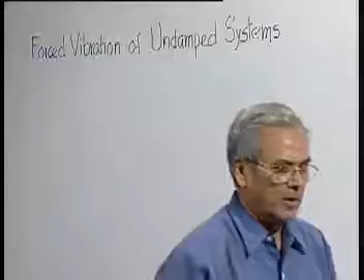Again, to keep our discussions simple at the beginning, we take up a single degree freedom system subjected to excitation force. Now we should also beforehand know that forcing, what does it mean?

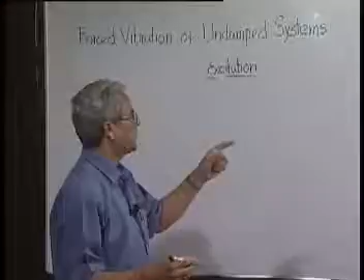So excitation of a system can be of various types. First of all, we will classify the situations according to the nature of the forcing function or the disturbance. If the forcing is purely a harmonic function of time, like say if we call this the force, this is called harmonic excitation, because the excitation, the function of time, is a harmonic function of time.

But before that, we should classify in general excitation as periodic, that means where the forcing function is a function which repeats itself after a fixed period. So this kind of excitation which repeats after a fixed time, which we call time period, is called periodic excitation.

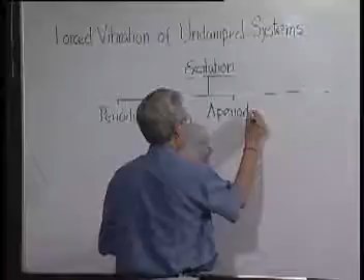Another kind of excitation can be aperiodic. Aperiodic excitation can be anything like this, which does not repeat itself after a definite time, that is called aperiodic.

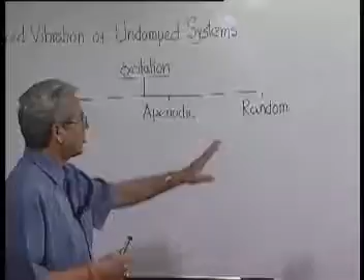And there is a very special case which we will not be able to discuss, but nevertheless very important, called random. There are many cases where the excitation is of random nature, which has certain special characteristics. What is random? But we will not go into those things, because we will keep our discussions to the simplest possible situation.

However, this periodic excitation can be further classified, as I was mentioning initially, into a case called harmonic, other is anharmonic. Say the second one, it is periodic, but it is not a simple harmonic function of time.

The classification of excitation can be again done from a different point of view. Here we have been doing it from the point of view of the nature of the excitation as a function of time. The other way of looking at the classification problem is what is the manner in which it is excited. For example, I can take this and try to vibrate by applying a force.

Sometimes a system can be oscillated or disturbed by applying some kind of a disturbing motion to its support or the wall to which it is connected. Sometimes a system vibrates by itself, only thing is we have to supply a source of energy. Sometimes it is excited by a periodic variation of one of the parameters, either stiffness or inertia or something.

So there is another way of classifying excitation, based on the fact of where from or how it is being excited. So there we can have force excitation. The other one, where the support on which something is resting is oscillated, that is called base excitation. Other one is self excitation. And there are cases, of course, which we call parametric excitation.

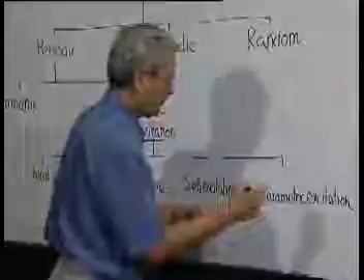So our problem of forced vibration can be any kind of combination. It can be a periodic anharmonic base excitation problem.

As always advised, we should take up the simplest possible situation. We have taken the simplest system, an undamped single degree of freedom system, but for forced vibration now, excitation also will take the simplest form - harmonic excitation, given in the form of either a force or a moment. Another reason harmonic excitation is so important is that any periodic function of time can be represented as a Fourier series, where each term or component is a harmonic function of time.

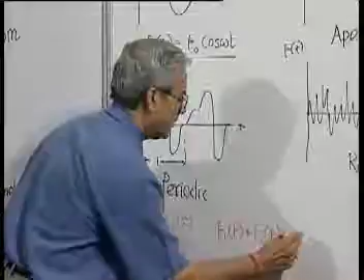As we are dealing with only linear systems, if a particular forcing function f1 gives a response x1, and another forcing function f2 gives solution x2, then when both are combined, they will give the response x1(t) plus x2(t). This is a very important result, but valid only for linear systems.

So if a periodic function of time can be split into a series of harmonic functions of time, then for each harmonic function we can get the response, and the resultant response will be the sum total of all the responses. So if we know how to solve the problem for harmonic excitation, we can solve for all periodic functions of time.

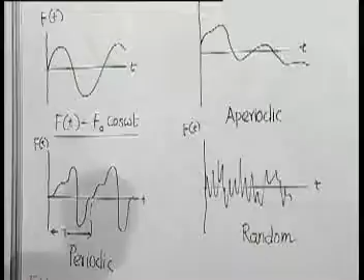Even aperiodic functions of time can be represented using an infinite Fourier transformation, where instead of discrete frequencies, the frequency spectrum will be continuous - we will see such cases. The conclusion is that even this problem can be solved using the system's response to a harmonic function, because this can also be represented in terms of harmonic functions of time using Fourier transformation. So if we are handling linear systems, knowing its response to harmonic functions of time can give the result of any type of forcing.

With this little introduction, let us solve the problems one by one. First we will take up the case of an undamped system with single degree of freedom, which is excited by a force that is a simple harmonic function of time.

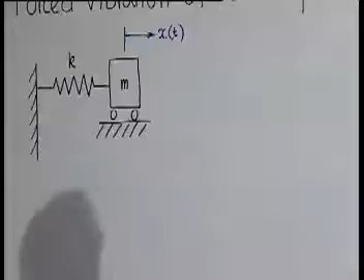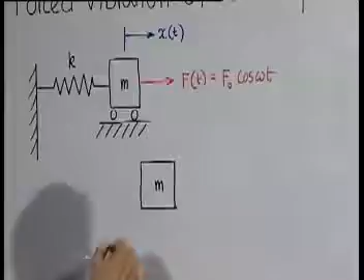It's a very simple problem. Let us find out the expression for x, that is the response of this system. At any instant of time, the forces acting on this system will be kx.

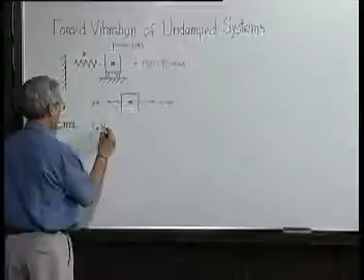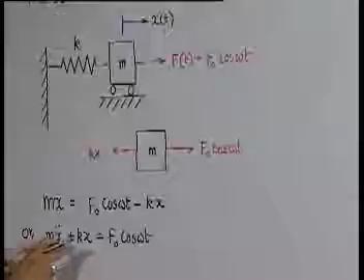So total acceleration in this direction, x double dot multiplied by m, has to equal the total force in that direction. This gives the differential equation which you have to solve. We know that the general solution will have two parts: one is the complementary function, that is the solution of the homogeneous part of this equation, mx double dot plus kx equal to 0, plus the particular integral, which we have to find out for this case.

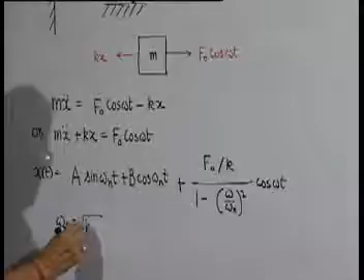So the complementary function, the solution to the homogeneous part of the equation, we already know from our previous lectures. This is the complementary function, and this is the particular integral. Here, omega n is again the natural frequency of the system.

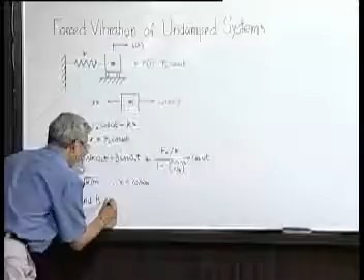We also define another quantity, R, the frequency ratio, given by the ratio of the forcing frequency to the natural frequency. Now these constants A and B will depend on the initial conditions - that is, what is the starting velocity and position.

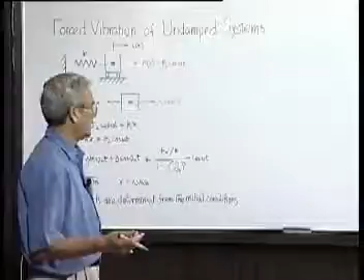So let us now try to solve this problem. We know x(t) is equal to A... so x dot(t) will be...

Let us consider a relaxed condition to begin with: at t equal to 0, let both x and x dot be equal to 0. This is something which is possible in forced vibration. In free vibration, if we give initial conditions as x and x dot both 0, the system will continue to remain at rest. But since now we are disturbing the system, it will oscillate.

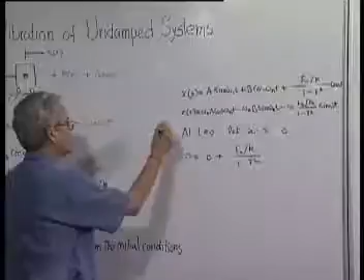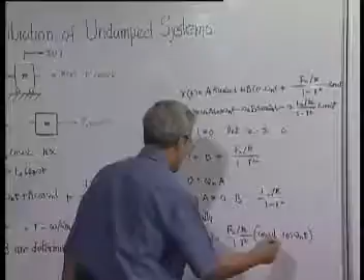So putting this in, what we get is 0 equal to B plus... and if we put t equal to 0 for x dot equal to 0, we get another equation. So the two conditions give us A equal to 0 and B equal to minus... and the solution becomes this, which can be written in a slightly different form.

This is pure trigonometric manipulation, so this is our final solution that shows how a perfectly undamped single degree of freedom system will respond to a purely harmonic forcing function like this. So let us plot it.

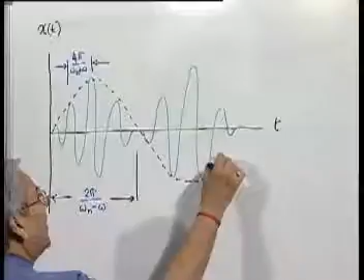So in a crude manner we could say that this is a harmonic function of time where the magnitude or amplitude fluctuates slowly with this form, and that is how we are getting the fluctuation of the amplitude as a slow process, with a time period of 2 pi by omega n minus omega. This whole thing completes one cycle, and this fluctuation phenomenon is known to you perhaps, which we call beat, and the beating period is this one.

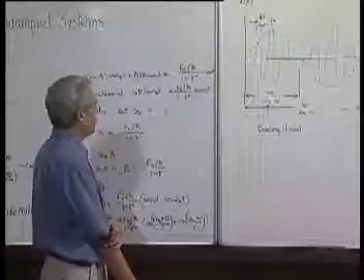Now one thing we see: suppose what happens when we start from a low value of omega. Omega is nearing 0, that means r is nearing 0. So this will be approximately 2f0 by k, and this will be approximately sine omega n by 2, and this will be more or less the same. But what we find is that as omega increases, it approaches omega n, when r approaches 1.

What happens to the beat frequency? Beat frequency is this. So when omega approaches omega n, the beat frequency or beating period approaches... since beat period is 2 pi by this, the beating period will approach infinity.

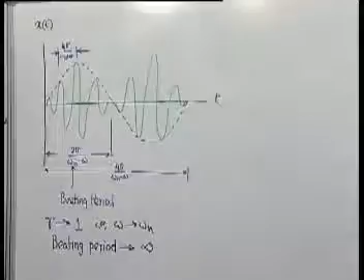Another thing we find is that the amplitude, the maximum value to which it fluctuates, depends on this quantity. And here, when r is approaching 1, this is gradually exploding, and the amplitude, which depends on this, also approaches infinity. So therefore, if we want to plot this under this situation...

This is a case where r is equal to 1. What will we get? It can be shown this angle is tan inverse, and of course this is still...

So now we find that when r is equal to 1, that particular case has an infinite beat period. That means it never comes back, it keeps on increasing. The maximum value to which we reach also keeps on increasing, and it can be shown mathematically, though we will not go into those things, that this amplitude will keep on increasing linearly, and the rate of increase can be decided by this angle of the tangent. So what is going to happen is that if such a system is there, it will keep on increasing in its oscillation amplitude indefinitely, and that is what we call resonance.

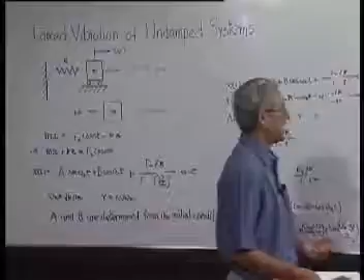That is why we should remember our earlier caution, that when a forcing function is acting, we should be careful that the forcing frequency never really goes anywhere near the natural frequency of the system. That is why when something is being designed, its natural frequency should be estimated, and it should be ensured that the system is never subjected to a forcing function or excitation where there is a chance of resonance.

These are the kinds of things perhaps you have heard, that when a military marches through a bridge, left right, and normally on solid ground they keep marching all in unison, that means everybody is in phase. But once they cross a bridge, they are always told not to be in phase or unison, and they are not supposed to march, they walk through instead. Because in case all these hundreds of soldiers keep marching with the same frequency and phase, the forcing function could match, or at least come close to, the natural frequency of the bridge, and it can cause disasters.

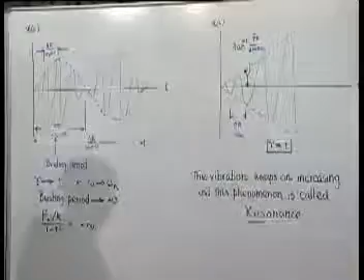And therefore, this is the point we wanted to make. But the common view held sometimes, that if resonance takes place, the amplitude of vibration becomes infinity, is not so. Actually, what happens in resonance is that the intensity of vibration keeps on increasing indefinitely. If you allow infinite time, and if the system is capable of taking infinite deformation, it will go to infinity. But really what happens is that the system gets damaged because of large scale oscillations taking place.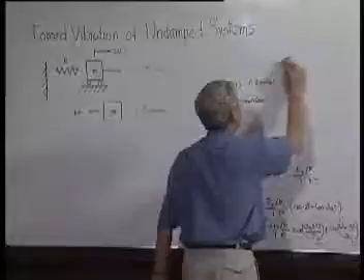However, this is a very idealistic situation, because in nature it is impossible to make a system which is absolutely free from any energy dissipation. Therefore, to make our analysis somewhat more realistic, even if we consider the system to be notionally undamped, meaning we don't show a specific damping agent or damper, we still have to keep in mind that there is certain amount of dissipation. It may be very small. In reality, even the very minute amount of damping present in a system will damp out the complementary function or the free vibration part. And how the response will look will be this.

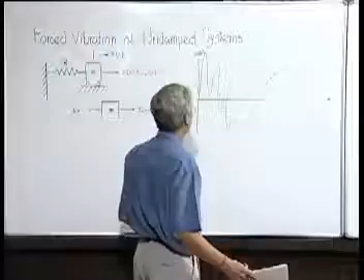Of course, I have shown this takes a short time, but in reality it may continue for a large time. Eventually the initial free vibration part, that is the free vibration part, will gradually damp out, and what will remain is only the complementary or only the particular integral.

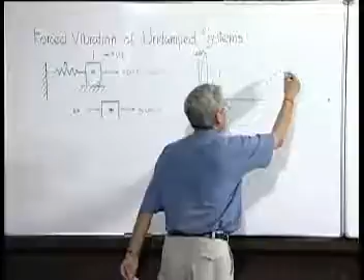So the response in the steady state situation, meaning it will keep on maintaining its nature and character, is called the steady state. In steady state, the solution xt is only the particular integral part, because the natural vibration part represented by the complementary function has gradually died down.

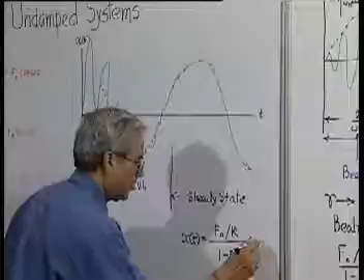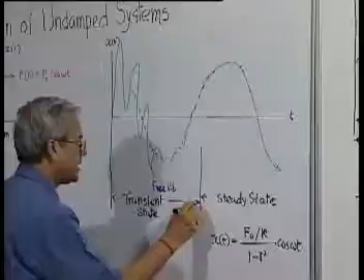That is the response, and this is what we call transient. It is a passing phase. So this does not repeat itself. After it reaches the steady state, there is no further change, and there the response is this.

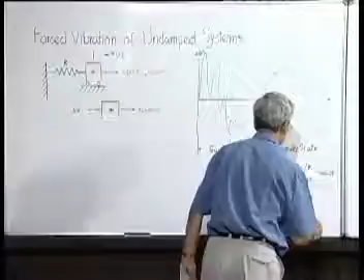So in general, our primary concern is the response of a system in the steady state, which in this particular case happens to be this. Of course, R is not equal. Now, you see this f0 by k, here we find that the forcing function is cosine omega t f0, and response is also similarly some quantity into cosine omega t.

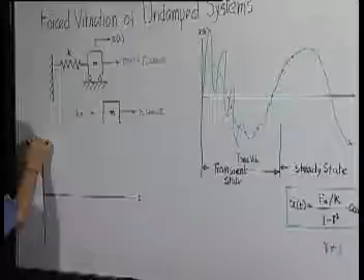So if we plot in the steady state, the response will look like this. If we plot both x and the forcing function in the same graph, it will look something like this. And the response will look like this, where the magnitude of this is f0 and magnitude of this is f0 by k. This is the situation when R is less than 1.

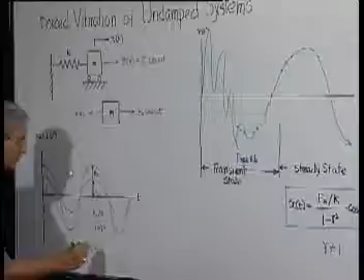When R is more than 1, then what will happen? Then for this case, x will be like this. I want to keep this always a positive quantity. So we can write this as r square minus 1 and take minus sign here, and we can write this as so. Therefore, what will happen now is that the forcing function and the displacement response will be just out of phase.

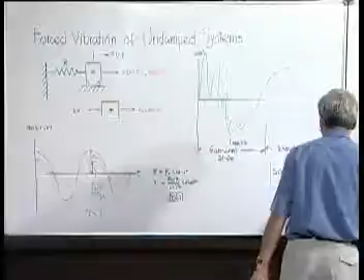Now this quantity f0 by k, what is this? This is nothing but the static deflection if I apply this force, that is f0 statically. So f0 by k is the displacement of the mass from equilibrium if the same load is applied in a static way, not dynamically. On the other hand, if the same force is applied dynamically, the maximum deflection is nothing but the amplitude of oscillation, which is f0 by k divided by this quantity.

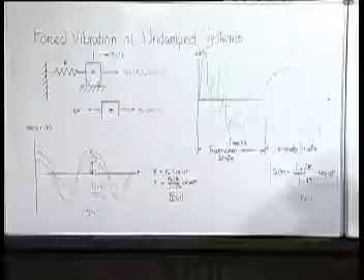So for this ratio, the amplitude of oscillation divided by the displacement which is static when the force is statically applied, we take its magnitude only, that is x divided by f0 by k magnitude, and this is nothing but, as can be seen here, x divided by f0 by k is nothing but 1 by 1 minus r square. This is called m, or magnification factor.

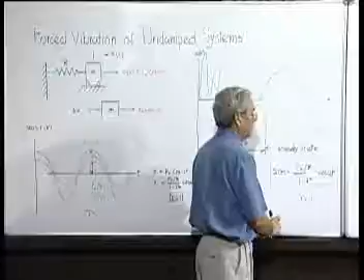It means that when a load is applied dynamically, the displacement of the system gets magnified compared to the situation when the load was applied in a static manner. Now, how does this magnification factor look?

This magnification factor, when we plot it as a function of r, it starts at r equal to 0 with magnification factor 1. At r equal to 1, it shoots up to infinity. When r is more than 1, it will become negative, but we take only the mod, so it becomes positive, and it asymptotically approaches 0 as r tends to very large values.

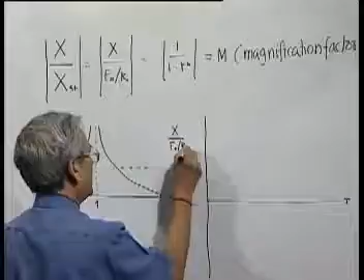Of course, if we just want to plot the ratio of the amplitude with the static deflection, when r is less than 1, x is positive and this quantity is positive. But when r is more than 1, x is negative because this quantity is negative. But if you take the mod of this, then we get back this same term.

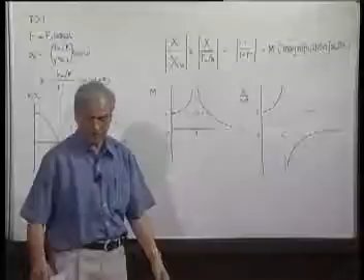So this is called the steady state response of a single degree of freedom undamped system, whose response characteristics are indicated by this plot, where the magnification factor or amplitude at a particular frequency is given. For the whole range of possible frequency ratios, the magnification factor has this kind of characteristic. This is the simplest situation which we have discussed.

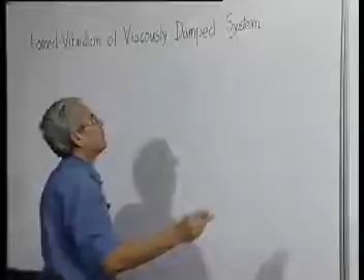Next, to take up more realistic cases, we will now consider a viscously damped system and subject it to a harmonic force. So we will take up a more realistic case where there is a certain amount of viscous damping present, and again subject it to a simple harmonic function of time as the force - the harmonically excited system.

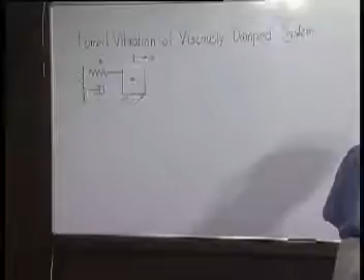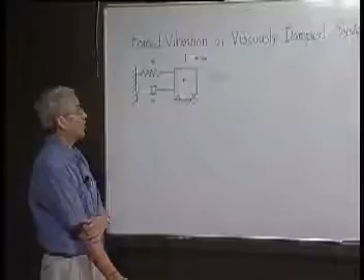This is the situation: our lumped parameter model with viscous damping, stiffness, and mass subjected to a simple harmonic force, a harmonic function of time f0 cosine omega t. The equation of motion we can write without going into the free body diagram again. We can write it where the right hand side is now not 0 as in the case of free vibration, but the external forcing function.

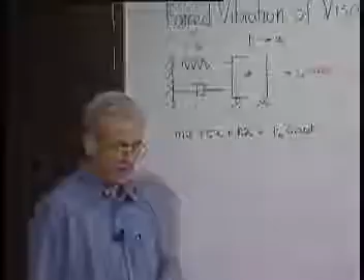Now, we have seen, and we can keep in mind, that any response of a system to a harmonic function or harmonic force like this will also be a harmonic function of time with the same frequency. This is a principle you should keep in mind: the response to a harmonic force will be a harmonic function of time with the same frequency.

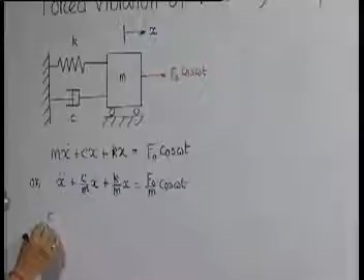That is the only thing to keep in mind. But before we go further, we will write it in a slightly different form, dividing the whole thing by m. Now C by m can be written as C by Cc, the critical damping coefficient, into Cc, which is nothing but 2 root km by m, and that equals zeta, the damping factor, into 2 root k by m, that is omega n.

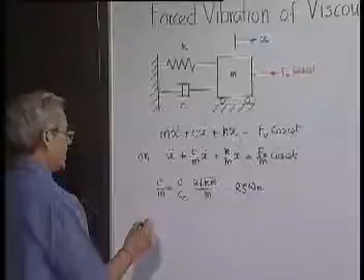Similarly, k by m is omega n squared. So this equation can be written in this form: x double dot plus 2 zeta omega n x dot...

This solution we can always write - let the solution be a harmonic function of time with the same frequency, that is all. So we can write x equals capital X, the amplitude, cosine of a function of time, a harmonic function with the same frequency, but there is no guarantee it will be with the same phase. So we cannot write cosine omega t here; rather we write it with a different phase.

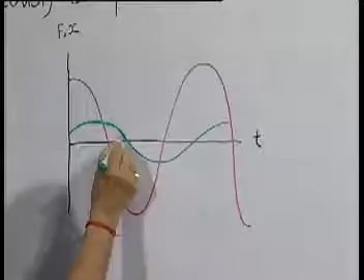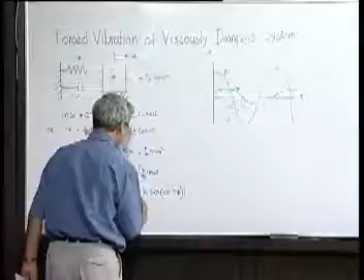So you can see this is again a harmonic function of time, the response, but not at the same phase as we had in the case of the undamped system. This is the most general situation, and there should not be any problem with this. So this is the response. Our job now is to find the magnitude of the amplitude x and the phase difference - that is what we want to do. What we will do now is substitute this assumed solution into the equation.

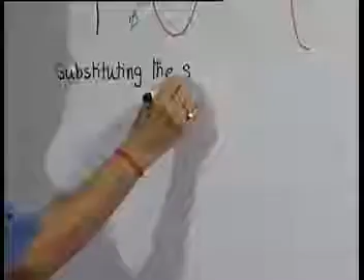So, substituting the solution in equation, what we will get is x double dot. If we differentiate this twice, what we will get is minus omega square x cosine omega t minus phi into, there is nothing else.

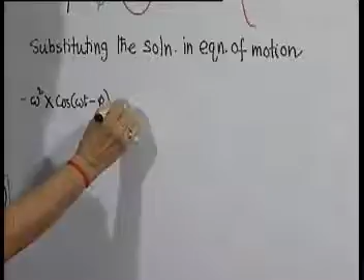So therefore, this will be the first term, plus minus twice zeta omega n omega, this is x dot, multiplied by 2 zeta omega n. X dot is minus omega x sine omega t minus phi, and we have multiplied plus.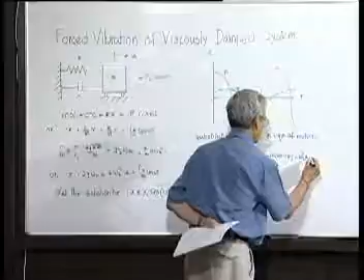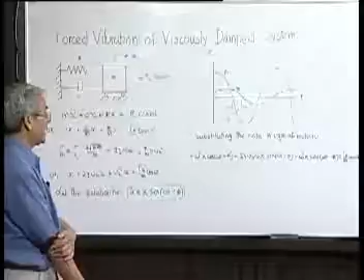And this is equal to... so therefore, we have converted the differential equation into an algebraic equation. What we have to solve for two quantities, one is x, other is phi. The technique is generally that we will see on both sides of the equation, the coefficient of cosine omega t on both sides must be same, and the coefficient of sine omega t on both sides of the equation should be same.

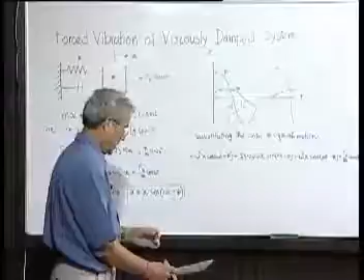So if we split this, that means when we split this, what we will get is minus...

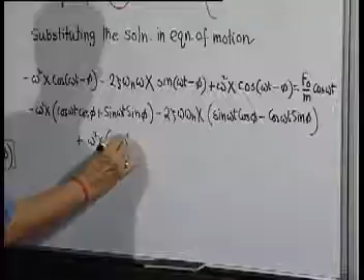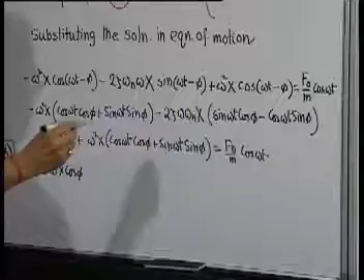Now, if we want to equate the coefficients of cosine omega t on both sides, what will be the coefficient of cosine omega t on this side? It will be minus omega square x cosine phi plus 2 zeta omega omega n x sine phi plus omega n square x cosine phi. This is the coefficient of cosine omega t on the left hand side, and that must be equal to the same on the right hand side, which is f0 by m.

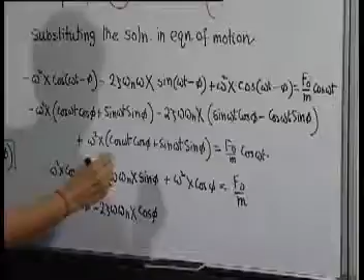Now again we have to equate the coefficient of sine omega t. So, and the coefficient of sine omega t on the right hand side is 0.

So from this we get, if we take sine phi and cosine phi, we get tan phi is equal to zeta omega... and if we divide the numerator and denominator by omega n square, what we get is 2 zeta r, that is the second equation.

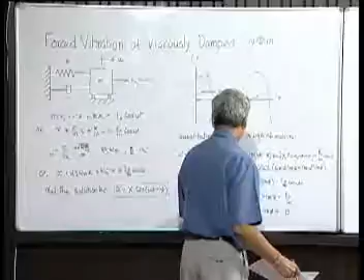The first equation will tell us x is equal to... so we take x common and divide f0 by m by the coefficient of x. So now if we take cosine phi common outside, we get f0 by m by cosine phi. If we take 1 by cosine phi, it is omega n square minus omega square plus 2 zeta omega omega n. So tan phi is already determined, is 2 zeta r by 1 minus...

Now cosine phi we can easily find out. Cosine phi is equal to 1 by sec phi, that is 1 by square root of 1 plus tan square phi. Now tan phi has been already determined, so if we substitute this here again, finally x we will get as... after simplifying we get this. So this is the response.

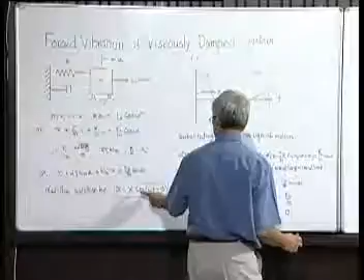Response requires two things to be given. One is the amplitude, which is this. The frequency is same as the forcing frequency, and the phase difference is... the characteristic looks like this. If you plot it...

Magnification factor again we define the same way, X by F0 by k, and as you can see, when r is tending to 0, then it is simply, this is 1, this is 0, so it will be 1. This way...

Now of course you have a parameter like zeta. For different values of zeta, we will get different response. So zeta is increasing in this, and this is zeta equal to... Similarly, that is so far as the magnification factor, phase difference characteristics.

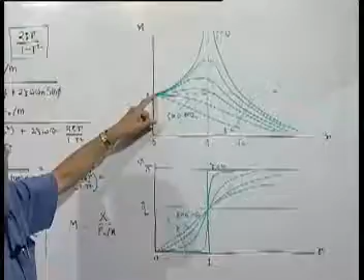So therefore, this is the general characteristics. Here again we find the phase difference is always 90 degree at r is equal to 1, and it is asymptotically approaching pi. So this is the situation. What we will do next is to look at this problem from a different angle using a different approach, which we will be taking up in the next discussion.